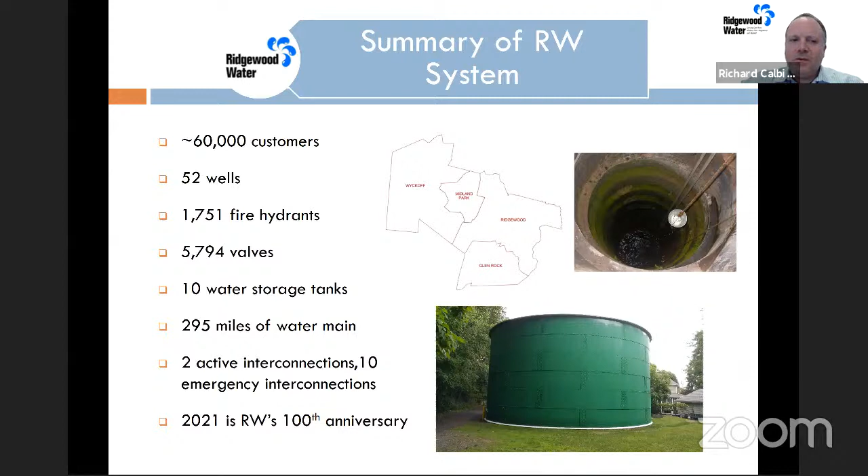Now, a little bit more about the background of our sources. The 52 groundwater wells account for 90% of the water treated and distributed into the system from our Brunswick aquifer. A fun fact about our wells: some of the wells are as deep as the Empire State Building is tall, over 1,000 feet, but most are generally in the hundreds of feet depth range. The other 10% of our water is purchased and used to primarily meet summer peak demands, and we purchased that from the Borough of Hawthorne, which is also a groundwater system feeding from the Brunswick aquifer, and from Suez Water, which is a combination of both groundwater and surface water.

Ridgewood Water's daily demand in the system from our customers ranges from a low of 5 million gallons a day to a high in the range of about 17 million gallons a day in the summer peak months. Most of this peak usage is associated with residential irrigation. To help manage this peak and lessen the concentration of PFAS in the water, Ridgewood Water will also be adding a third purchaser in the future, starting as early as 2022, and that is Passaic Valley Water Commission, who has a much lower concentration of PFAS in the water and a higher volume of water available for our use.

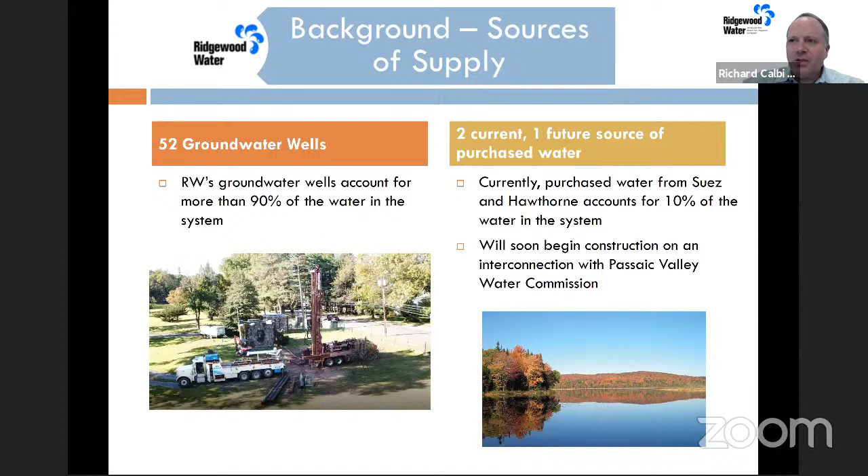So I'm going to stop there with the introduction. I'm now going to turn it over to Dan Timmeny. Dan is our Ridgewood Water business manager, and he's responsible for managing department affairs and specifically the customer service, billing, and metering divisions. Dan is going to talk about customer service.

Thank you, Rich. Good afternoon. Thank you to everyone for joining us.

Ridgewood Water has been planning an overhaul of customer service leading up to the rollout of 3 new user-friendly tools in the coming weeks. The first being a new Ridgewood Water website. The second, a transition from our current payment processing vendor MCC to InvoiceCloud. And the third is a software as a service portal called WaterSmart. We'll talk a lot about that coming up.

So the new Ridgewood Water website - when we set out to design it, our goals were for it to be user-friendly, organized, and aesthetically pleasing. We wanted to produce easy-to-find direct links to our most accessed items and those most used by our customers. We'll also feature interactive tools such as address lookup during annual hydrant flushing and service line material lookup. There will be a frequently updated news items section, and the website will be mobile friendly and directly linked to all of our social media platforms.

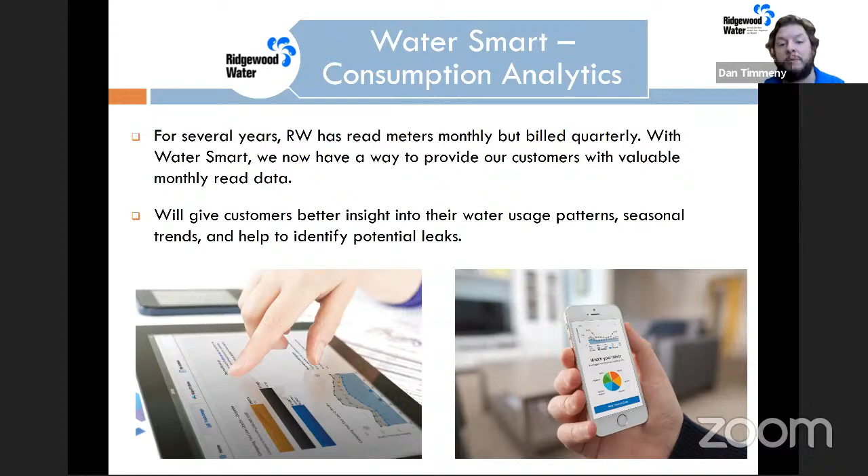And that valuable monthly read data gives customers better insight into their water usage patterns, seasonal trends, and will help to identify potential leaks, saving you, our customers, significant money.

So how does leak detection work? There's two-way communication regarding potential leaks that can help save money and reduce water waste. On the utility side, we'll be reaching out to some accounts proactively each month to ask customers to check for leaks on the property because of an observed increase in water usage. Based on the amount of water used, a potential leak might be associated with a higher likelihood of being, say, a running toilet rather than an irrigation leak. Customers can then respond to our communication about a potential leak directly, and based on whether or not a leak was found, we can then work together to initiate next steps.

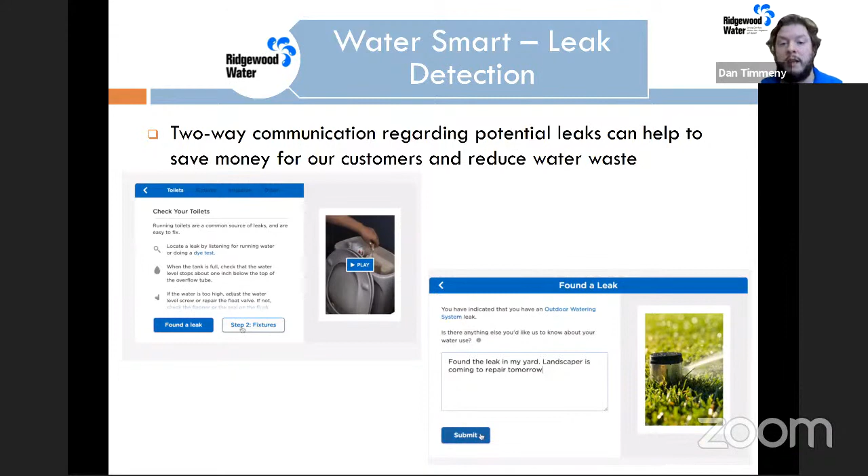So how do you register for WaterSmart and how do you access it? In the coming weeks, all Ridgewood Water customers will be receiving a welcome letter physically in the mail. All you need is to access your account number and your zip code, followed by a simple registration, just email and a password creation. Every account in our system will have a WaterSmart account already created on the back end. You simply need to sign in to access it. This tool, which again is free for all customers, will provide us with a platform to give you the information we've had internally, but also offer you many more self-service and communication tools. We're very excited to roll this out to you in the coming weeks.

Great, thank you, Dan. Definitely some very exciting stuff coming to customers that is going to help Ridgewood Water further its goals of water conservation, giving customers the ability to better manage their accounts and find leaks before they happen. In addition to that, giving the utility a better means of communicating with customers about such issues as PFAS. So that's great, exciting stuff.

So talking about PFAS and treatment, we're going to talk a little bit about background on what water treatment actually is. So with us today is Ryan Furrey. Ryan is a Ridgewood Water chemist, responsible for the Ridgewood Water lab and all the testing and associated compliance. So Ryan's going to give us some background on that and a few other things.

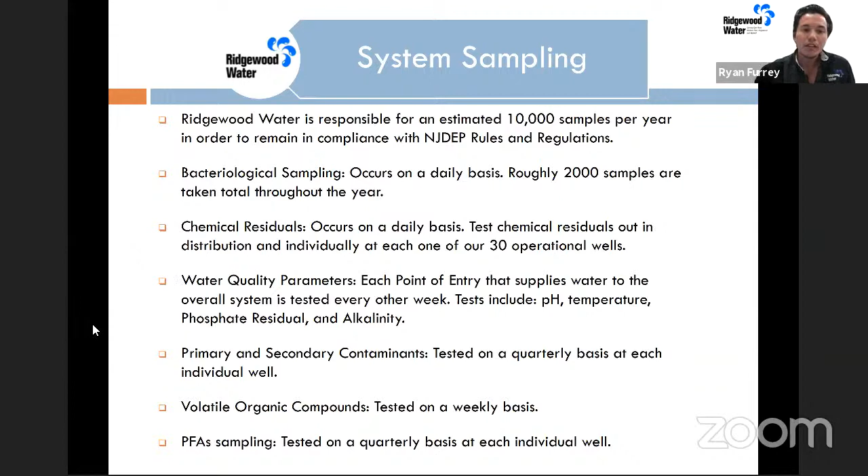If we move on to the next slide - this is one of the more interesting things that we've been a part of, and it's really exciting going forward: pilot studies. So basically, pilot plant studies are small scale water treatment devices that we take in a controlled setting, and we perform various tests and experiments on them to see how we can optimize our own treatment strategies, and how we can make not only the quality better for our customers, but potentially help financially, maybe reduce costs. We've been using these pilot plant studies in a controlled setting, meaning we isolate it from our system, and we perform these various experiments and treatment strategies on these small units without jeopardizing the health of the distribution system.

These have been very exciting. We've been partaking in this over the past couple of years, and it's a very proactive approach towards treatment strategies that aren't really utilized in a lot of utilities or even in private companies, to be honest with you. It's exciting because it helps us take a look at what our distribution system is doing, how we're treating our system, how we can better treat it, efficiently optimize it, and make sure we're providing the best water quality for our customers at the best possible rate.

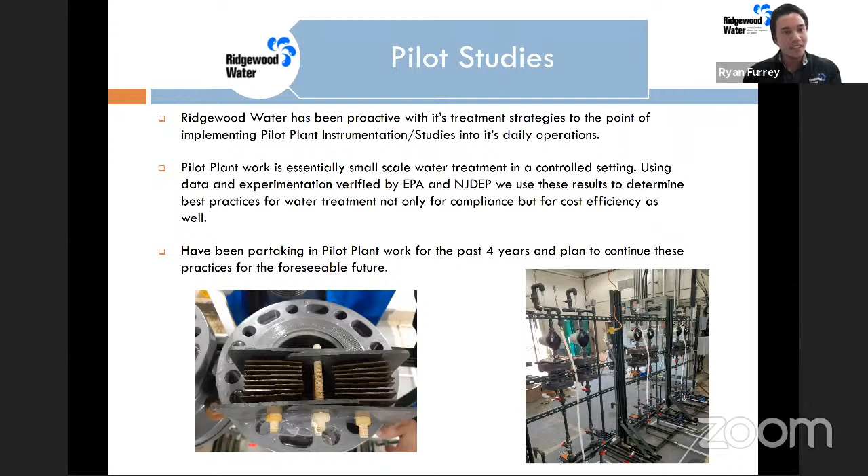Basically what happens is lead solder and lead service lines or copper service lines were used in the past for plumbing purposes, for distribution mains and so on and so forth, to help bring water from the utility out to the customers, which is you guys.

So basically what happens is as water is flowing over pipes or lead soldered joints or copper pipes, that interaction between flowing water and the pipes or the joints is going to rub. It's going to be like a friction thing. What you'd envision is like when you rub your hands together, you start to see some particulates form. It's kind of the same idea.

That friction, that water flowing over pipes, is going to degrade the chemical bonds for lead and copper, and it's going to leach into the water supply. And that's how basically lead and copper contamination occurs in a utility.

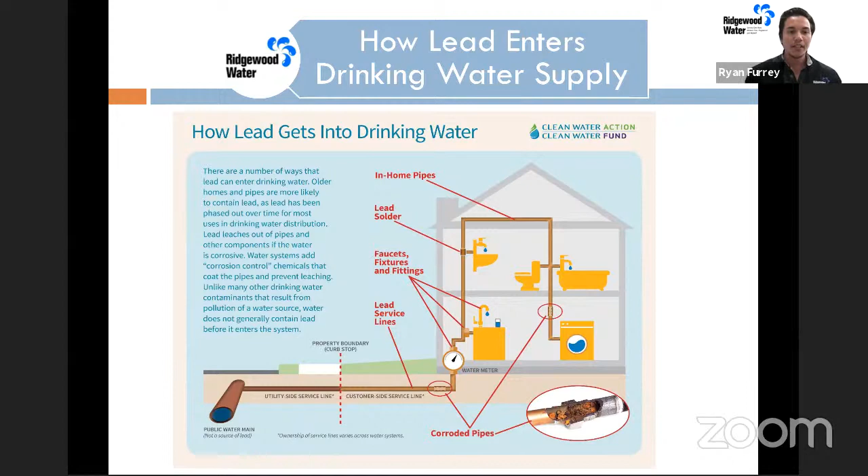So what we do to ensure that doesn't occur is we implement corrosion control treatment. Like I was saying before, we add a polyorthophosphate inhibitor to the water supply to basically ensure that this lead and copper contamination doesn't occur. Polyorthophosphate is just essentially a food grade additive. It's used in daily foods that everyone will be consuming on a daily basis. So it's not something that's out of the blue and going to cause any negative health effects.

And what it does is it forms a small biofilm in the pipes. Basically what we want you to picture is you have a pipe and then you have flowing water. Flowing water on a bare pipe is going to have that friction, and it's going to leach lead and copper into the water supply and cause contamination.

By adding this polyorthophosphate into the pipes, what it does is it creates kind of like a shield. So you have the pipe and now you have a barrier in between the water and the pipe, and now you don't have that interaction anymore. You don't have that friction that's occurring. So now that's how we protect you all from lead and copper contamination.

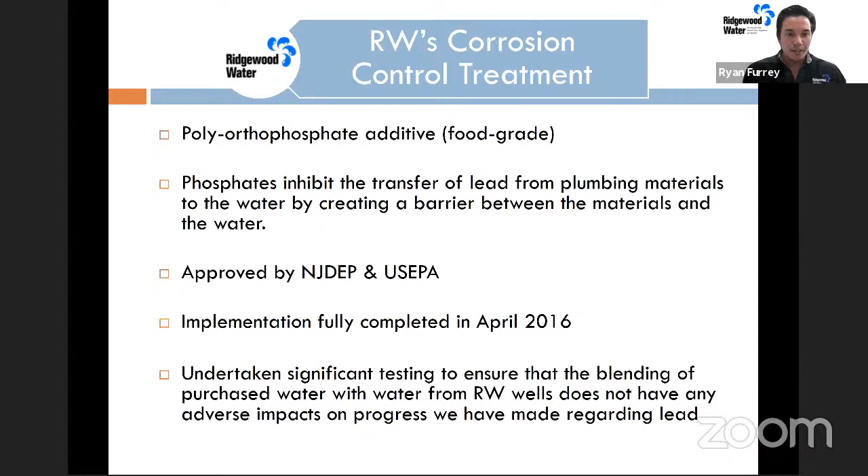We implemented this corrosion control technique in April of 2016, and from our results, they've been nothing but stellar ever since. This is a snapshot of that implementation from 2016 up to our current point of 2021. And as you can see, both lead and copper have been going down ever since 2016.

You see 0.006 for lead and 0.245 for copper in 2016. Up to current days, we have non-detect levels for lead, which is fantastic, and 0.006 for copper. So obviously there's a reduction for lead and copper in our system once we implemented this corrosion control inhibitor, and it's been effective ever since. Like I said, with the pilot studies, we're trying to optimize it even better and hopefully make the results that much better going forward in the future.

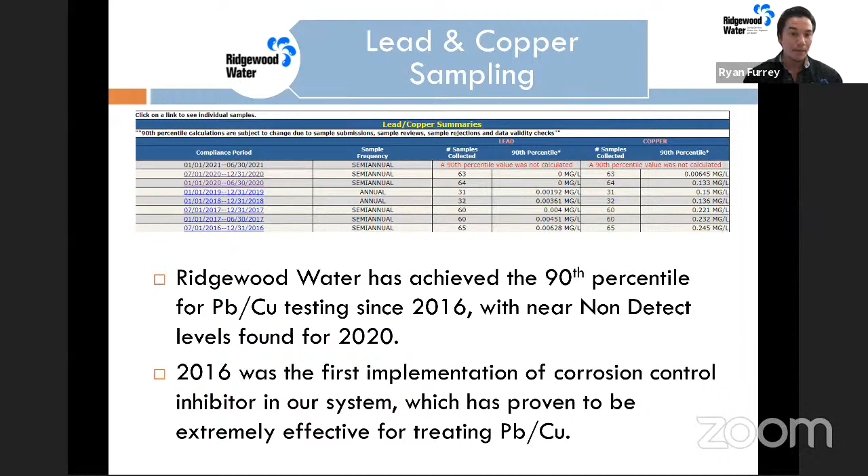So just another recap of the results analysis. The lead action level is 15 parts per billion. Our levels as of last year were 0 parts per billion. Copper action level is 1.3 parts per million, and our levels were 0.00645 parts per million. These were actually our lowest lead and copper results in the history of Ridgewood. So it's something we're very proud of. We take pride in giving you guys the best water quality that we possibly can.

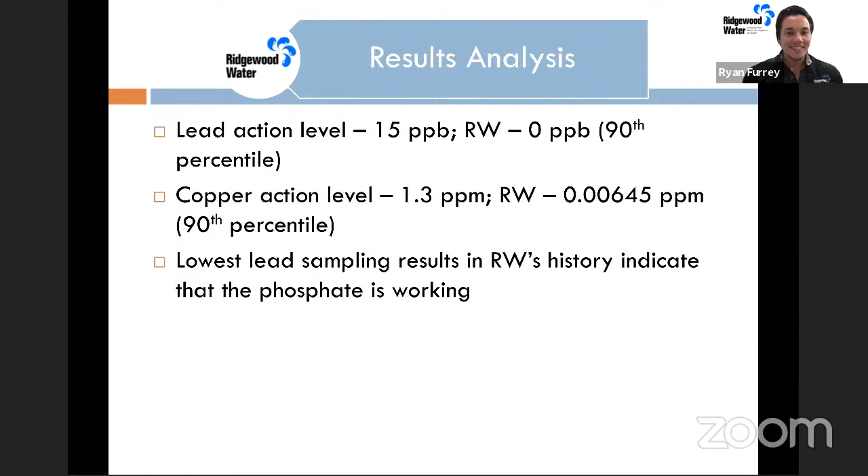So this is just a little snapshot, a little overview of what has been happening in the system. If you guys want more information, you can go on the NJDEP website. Just type in NJ Water Watch, look up Ridgewood Water, and you can see all this data online. So it's exciting things, and we're looking forward to continuing to give you guys the best water quality that we can.

Great, thank you, Ryan. I think it's important that you pointed out the lead issue, because it's probably one of the most prevalent questions that we get. Even now with the introduction of PFAS, people are still always asking about lead in the water, and lead is primarily at the home. It's important that we're providing the treatment to make sure you don't get that corrosion in the pipes. But if you do believe you have a lead issue at your home, please contact us. We have lead test kits available.

We could drop them off at your home. It's done through an independent lab, not tested by Ridgewood Water. The results go directly to you. And then from that point, if there is any detection, we could help guide you as to where that's possibly coming from in your home.

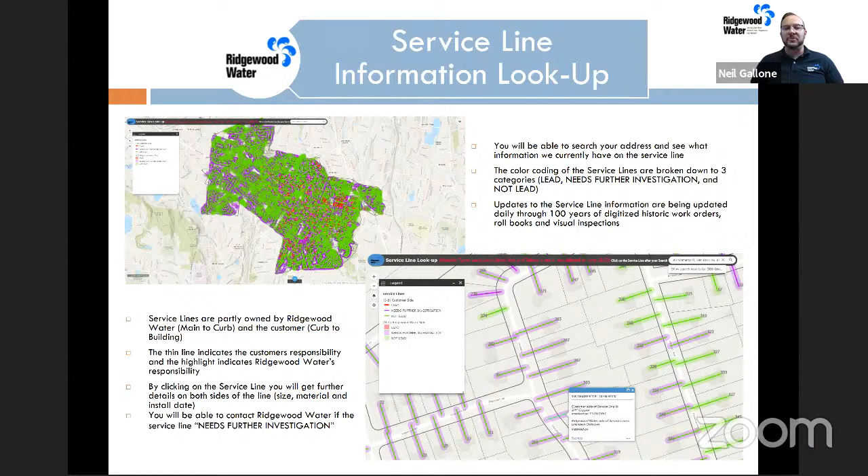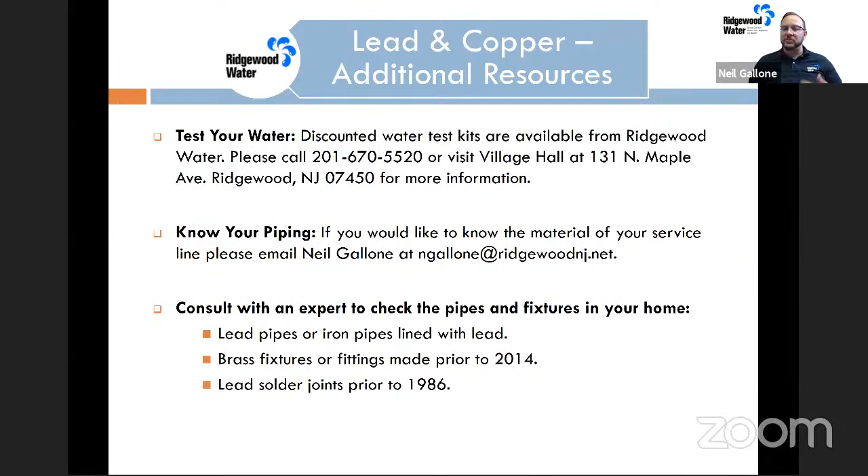Once you know what your service line is made of, or if we need to do some further investigation, we still have additional resources that Rich also mentioned before. You will be able to pick up a test kit or have a Ridgewood Water employee drop off a kit at your home when you reach out to customer service. It will include instructions on how to perform the test, when to perform the test, and where to send it.

The second tool pertains to hydrants. This slide is showing a current dashboard that we are using internally during hydrant inspections. Hydrant inspections normally have very little impact on your water service or quality, and are primarily performed to make sure that the hydrant is fully functioning. We typically perform these inspections through the spring and summer during normal working hours.

I'm going to provide you with a very similar dashboard to what you see here, except it will be pertaining to hydrant flushing that we usually do in the fall. We do this in the fall because of the supply constraints we have in the spring and summer, and the temperatures being too low in the winter, which can cause a lot of icing on the roads or walkways. Our flushing uses about 1.5 million gallons of water and is performed at night because the impact on your water service and quality is much greater when performing hydrant flushing than hydrant inspections. We use a lot less water during inspections, and also use a much lower rate of flow.

With the flushing dashboard, you'll also be able to see when the hydrants are being flushed live. They will turn from red to green. When you zoom in on your property, you will also have not just a route number that your home is in, but below that, an estimated schedule that will give you an idea within a day or so of when we believe we'll be in your area.

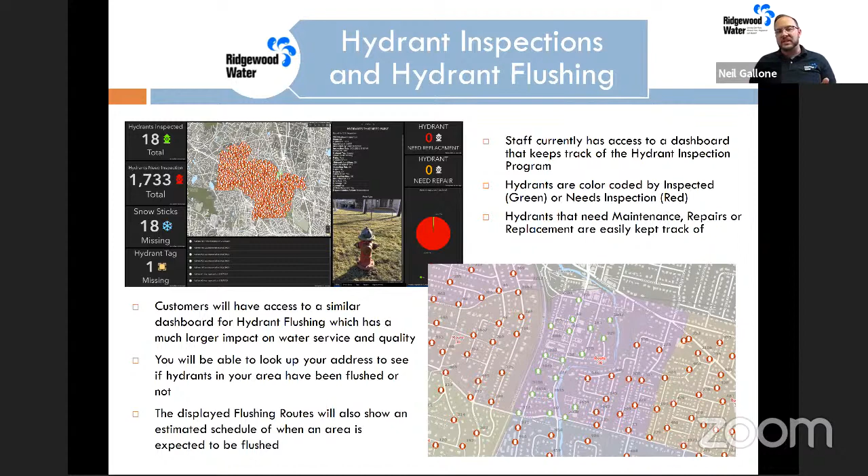The last tool I'm going to show you today is something that should be very familiar to you if you've ever had an electrical outage. If you go on to PSE&G or Orange and Rockland's website, you'd usually be able to type in your address or your account, and you'd be able to see if there's been any outages called in your area. If not, you'd be able to call it in, and then you'll see it show up on the map.

With this tool, you'll be able to see both emergency and planned outages. They'll be displayed along with the exact location of an event, and it will also highlight any of the customers that are affected. Some examples shown on this tool will be main breaks, main replacements, valve installs, maintenance to our system, or even boil water notices.

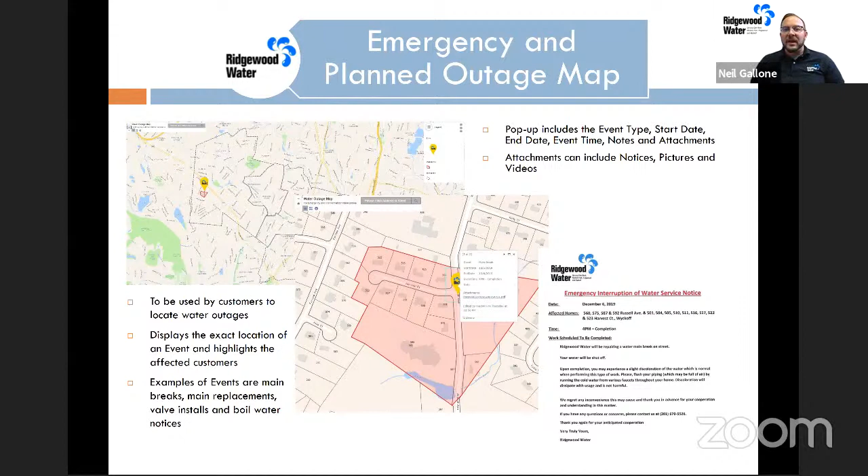All of these tools are also going to be coming with how-to videos that will assist you while using them. And I'm getting really excited. I think these tools are going to be very helpful for everybody. That's really all I have for this afternoon, and I'm going to give it back to Rich.

Thank you, Neil. Again, it shows that there's a lot of new things coming to the customer's dashboard for their ability to see more of what we're doing and how we do it. The important part for me, you touched on it too, is that this system's been here for 30 years, but never until now has it been so important for us to pay attention to our assets.

We have pipelines that have been in the ground for, in some cases, 100 years. So now we're able to track that age, know when things need to be replaced, and make the best use of the ratepayers' dollar in upgrading the system. Very important work that you and your team does.

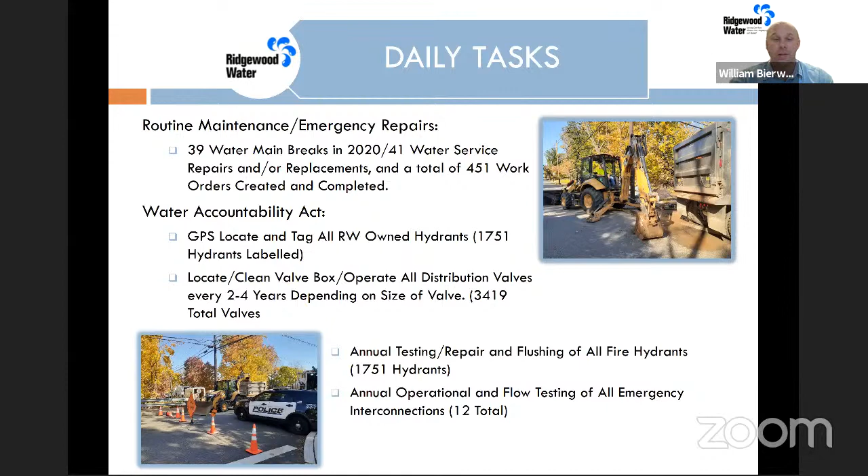In 2020, Ridgewood Water initiated in-house efforts to replace 580 linear feet of undersized and beyond useful life water main on Hudson Street in Ridgewood. Three quotes were solicited for the replacement, and prices ranged from $147,500 all the way up to $300,000. Distribution staff completed the entire project for $89,500, including base pave, for a savings of over $58,000.

In 2020, Ridgewood Water also contracted OnQue Construction to replace over 4,100 linear feet of water main. Another 2,000 linear feet of water main is scheduled to be replaced in-house throughout 2021. Just to put that into perspective, that's a grand total of just under 2 miles of pipe installed in less than 2 years.

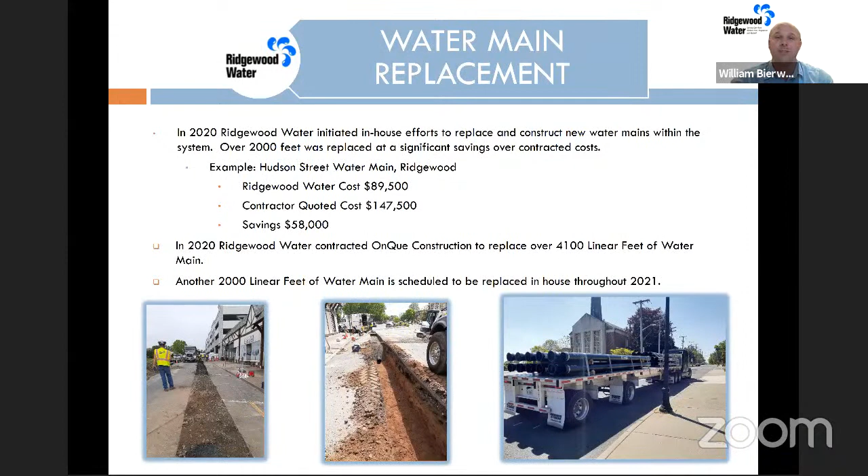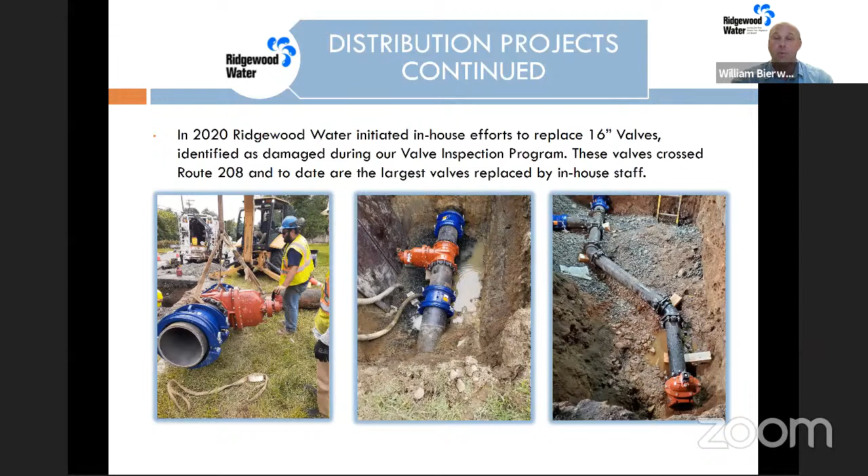Towards the end of 2020, Ridgewood Water staff identified two damaged valves during the routine valve inspection program. These valves crossed Route 208, and replacement required coordination with the NJDOT, Wyckoff Police Department, the treatment division, and various local traffic details. Each 16-inch valve weighed over 1,250 pounds without the fittings, and to date is the largest in-house valve replacement performed by Ridgewood Water staff.

I'll turn this over to Rich for the intro on PFAS and the master plan. Sure, thanks Bill, and thanks for highlighting distribution. I know in addition to the Hudson Street main, you had replaced mains in a couple other towns last year as well. Everything we're talking about here today comes in response to our requirements to comply with the new Water Quality Accountability Act, a New Jersey law that requires us to turn valves, replace an amount of main each year, and check the fire hydrants. So it's all compliance issues, and we're trying to share the details of that with everybody.

So our next important topic definitely requires an introduction: PFAS. This is a new contaminant emerging in the water. It happens that it has been in the water for decades, but has only been able to be detected recently due to new technology. So I'm going to lead into Bill to summarize it and talk about our plan. Dan's going to talk about some of the costs around the plan, and then we're going to get to the important questions and answers.

Thanks again, Rich. This is just a quick background on PFAS. We could probably spend the entire day talking about just this subject.

So what are PFAS? These are per and polyfluoroalkyl substances, of which there are hundreds of compounds. Most commonly would be PFOA, PFOS, and PFNA. They're man-made chemicals used for things such as firefighting foam, carpets, stain resistance, even paper food packaging. So they're very widespread and extremely persistent in the environment. They've been found in Alaska, miles and miles away from human interaction, in polar bears.

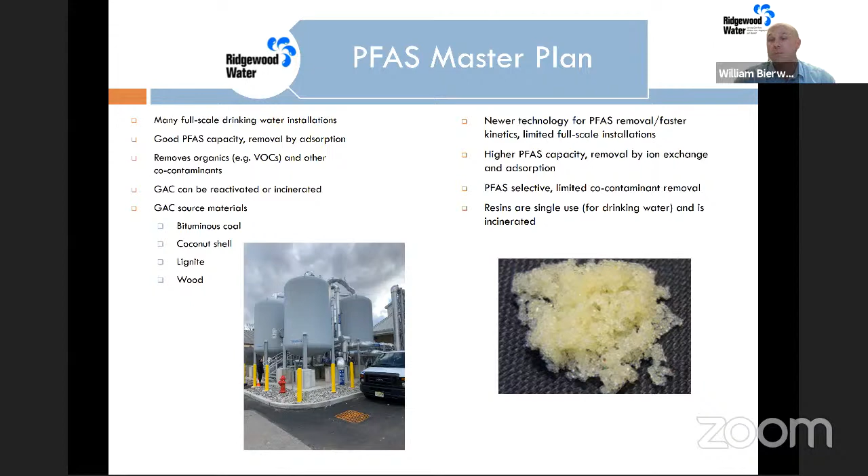Resin is a newer technology. It's very selective in what it removes, tending to just remove PFAS. It's also single use and has to be incinerated for disposal. These cannot be regenerated. Next slide, please.

What I'm going to talk about next is our treatment centralization. Through collaborative research with key Ridgewood Water personnel, Mott MacDonald developed a plan to centralize treatment. This method will reduce the number of treatment facilities from a current 30 down to 12 points of entry. To facilitate this, over 61,000 feet of raw water main must be installed, as well as 12 new treatment buildings. There are some important factors we looked at considering this design.

Space availability is probably one of the main ones for Ridgewood Water. As some customers know, our wells are located in backyards, tiny postage stamp-sized lots. There's also workforce requirements. If we were this spread out with this many treatment facilities, we'd need to add numerous personnel to our staff.

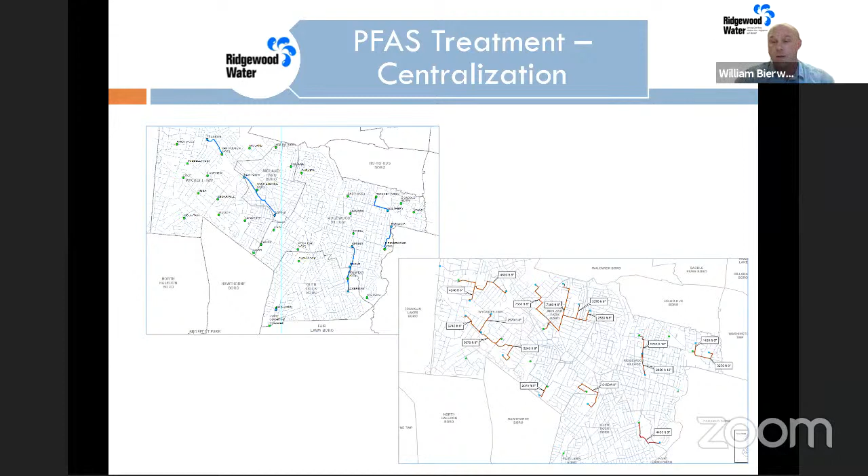There's also seasonal operations to take into account. Our demand can go from 4 or 5 million gallons, as Rich talked about, in the winter, all the way up to 17 or 18 million gallons in the summer. We have to be able to not only meet that demand, but treat that water. And you've got to give design consideration to anything that comes out in the future, any emerging contaminants.

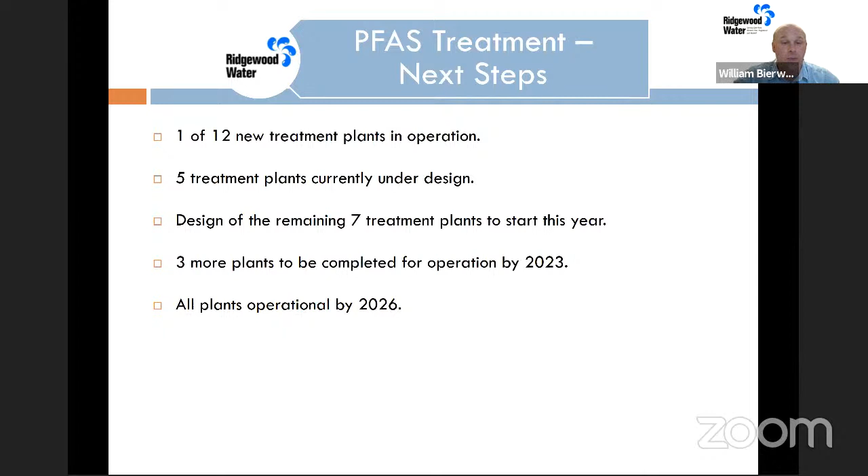Next slide, please. So presently there is one GAC treatment facility in operation, providing PFAS-free water to the system. There are 5 additional plants currently under design, and an additional 7 treatment plants will begin later this year. 3 more plants are to be completed and operational by 2023. Lastly, all plants will be operational by 2026.

So now I'll pass this over to Dan Timmeny, our business manager. He's going to talk about funding this endeavor.

Thank you, Bill. So let's talk about costs. How do we fund the capital improvements and expenses associated with PFAS removal and treatment?

As a reminder, Ridgewood Water has filed a complaint against some of the manufacturers of PFAS chemicals, but it will take years for the litigation to work its way through the court system, and there are no guarantees as to the result of that litigation. While we certainly will be looking to see if any funds are made available in the future at the state or federal level, there are none today.

So we wish that we had other options available to us, but right now we have to absorb these costs of operation, which will be reflected in future rates.

We thought, rather than raising the volume rates by some amount, that we would hire an independent rate consultant to assist with the development and financial calculation of a PFAS-specific surcharge to fund remediation and necessary system changes, as was just discussed. We will continue to utilize the services of the independent rate consultant each year to recalculate the upcoming year's required PFAS surcharges. Essentially, we have separated out PFAS-related costs.

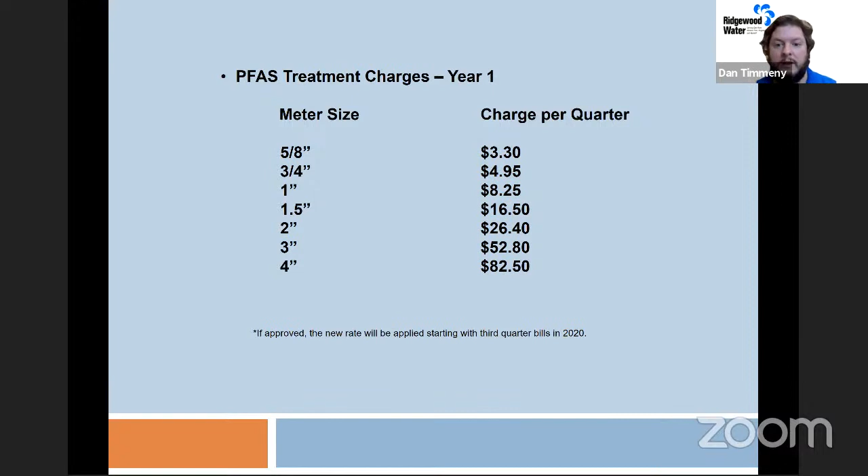So what does this mean for you, our customers, right now? In terms of the charges you're going to be seeing for a 5/8 meter, more than 90% of our system has the small 5/8 inch meter, which means a quarterly charge of $3.30. So how are those fees calculated? It's based on the maximum flow rate that customers can actually take from the water system based on demand. The larger the meter size in your house or business, the more the quarterly charge will be going forward. Again, more than 90%, I believe 92% of the system is the 5/8 meter, which is $3.30 per quarter. That will be the rate for this fiscal year.

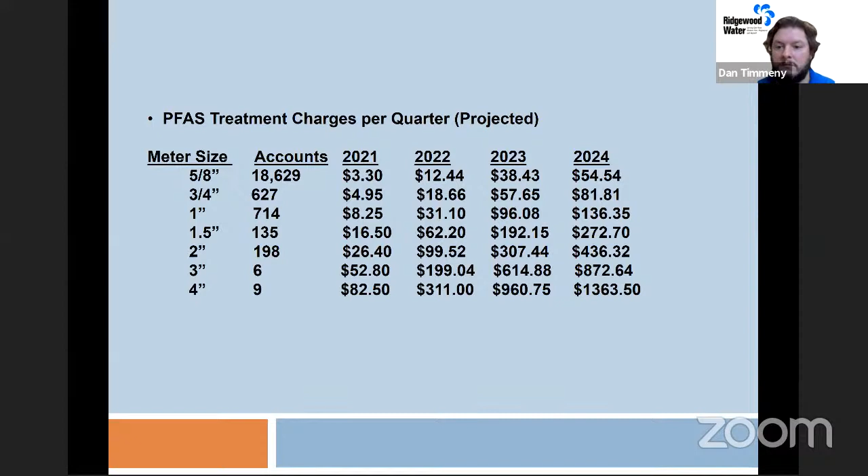All right, thank you, Dan. Thank you, Bill.

Definitely glad you brought up the recovery portion of that, Dan. As a ratepayer myself, when you see the numbers, it's rather alarming. But I know we're all doing everything we can to obtain grants, pursue the ongoing legal action, and any path available for cost recovery. Just recently, all four municipalities supported us on a congressional grant request to a local congressman, Gottheimer. We're very hopeful for that and his help. So anything that comes in from those type of programs will go directly against those costs you outlined.

All right, so with that, we're going to jump right into the question and answer portion. Again, there are a bunch of questions typed into the Q&A. Additionally, if you want to verbally ask a question, I believe there is a raise hand function. But before that, I want to thank all the presenters again — you all did a great job outlining different parts of the presentation. This is an important year for Ridgewood Water: our 100th anniversary, 100 years of service to the Borough of Glen Rock, Borough of Midland Park, Township of Wyckoff, and the Village of Ridgewood. It's clear from what was outlined today that Ridgewood Water is in a good place to move forward for the next century of operation. So with that, I'm going to move over to questions and answers.